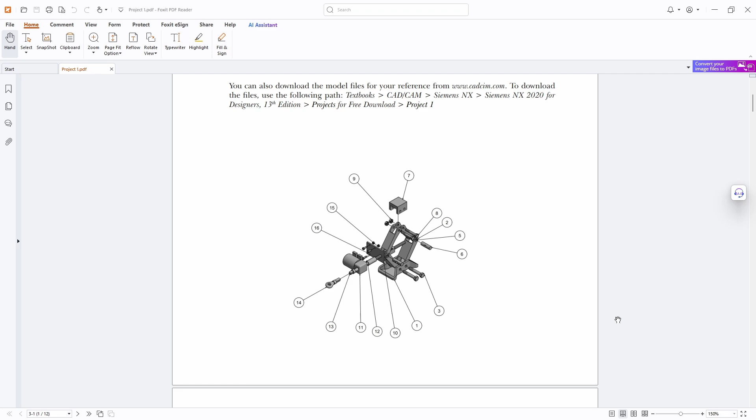Hello, today we will be continuing on with the car jack assembly. So in this assembly we will be working on item number 3 and 4. We got the hex bolt, the M12 by 1.75 hex bolt, and a nut. So 3 and 4. So let's zoom into 3 and 4 right here. These are 3 and 4s hidden on the other side.

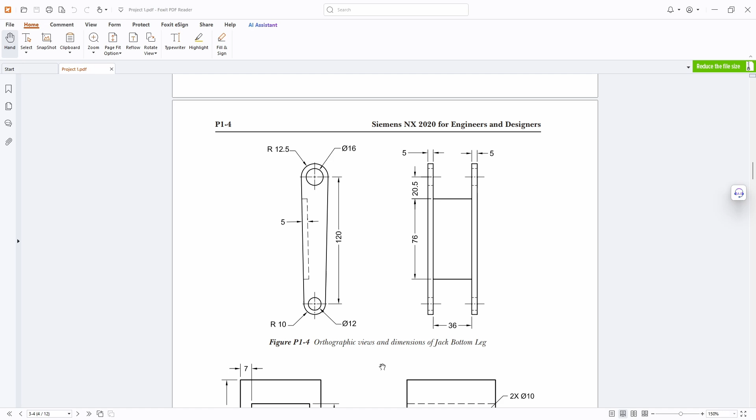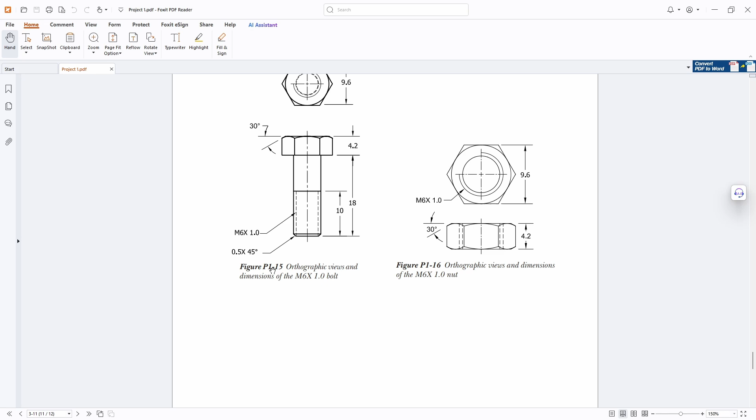And today we will be working on P1-17. So this is an M12 bolt. So we will take the previous bolt, which was P1-15, and modify this one to make it P1-17. So let's get started. Alright, so this is P1-15. We will do a file save as. And then we'll change that to P1-17.

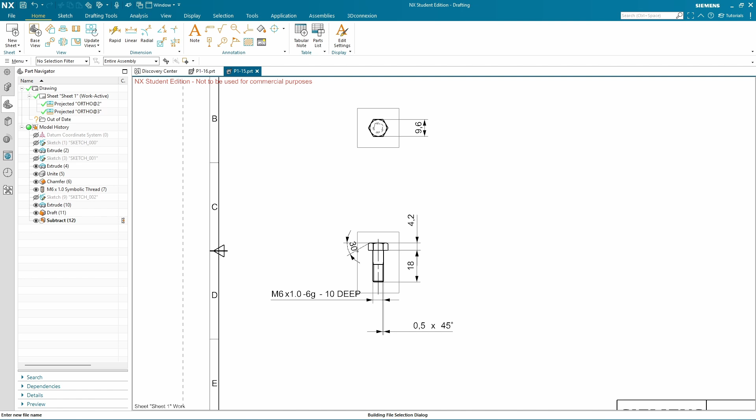Modeling mode. Now here's our item. We need to make the head size.

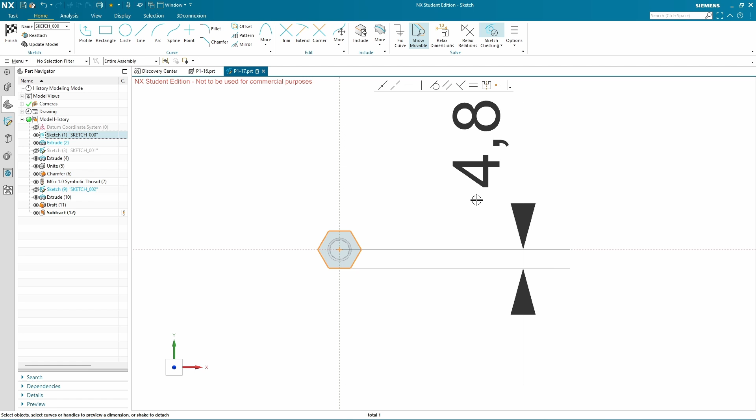Alright, so first one is we're going to click on this sketch right here, double click, and we're going to change this 4.8, and this time they're going with a total of 19.2, so we'll do 19.2 divided by 2, okay? And we don't need an expression, we're okay. Escape and finish that sketch, okay? It's starting to break things, but we're going to fix this in a second, no problem. So next is the extrude. So we're going to take the extrude and we're going to go with 8.4 millimeter.

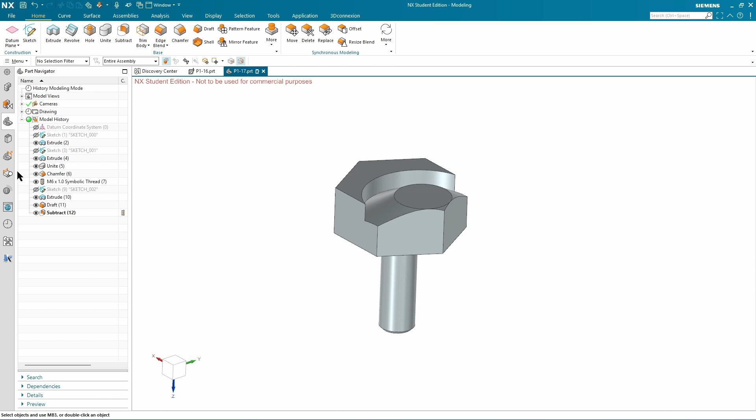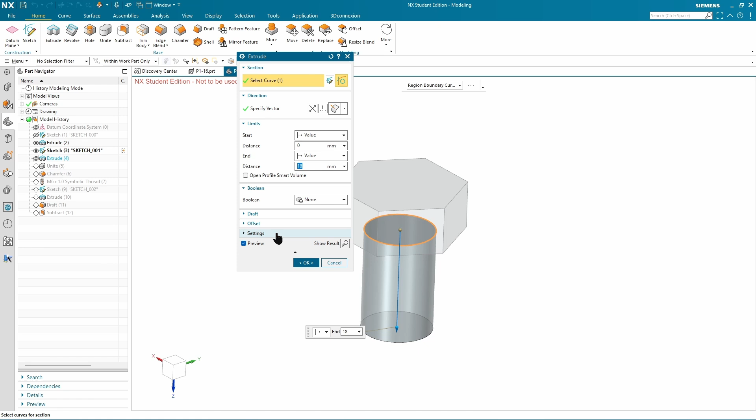Okay. Next we're going to go with the next one, which is this diameter here. This is going to change to M12. Escape, finish. There we are. Okay, so next is we want to extrude that 70 millimeters. Okay, it's okay. It's breaking. The symbolic thread is having an issue, so let's fix the symbolic thread.

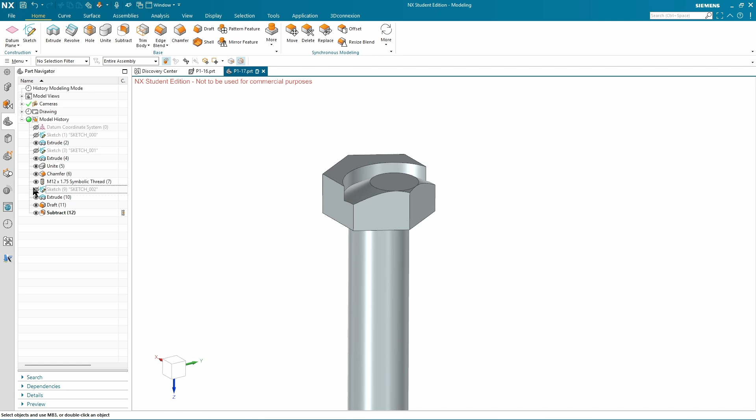Let's click on this guy, and we're going to click here, M12 by 1.75, exactly what we want. We're going to change this to 24. Okay, and now we can see this broke. For some reason it took it off something else. Yeah, should be there. So maybe we can just link this up, center that with center this, and make it coincident.

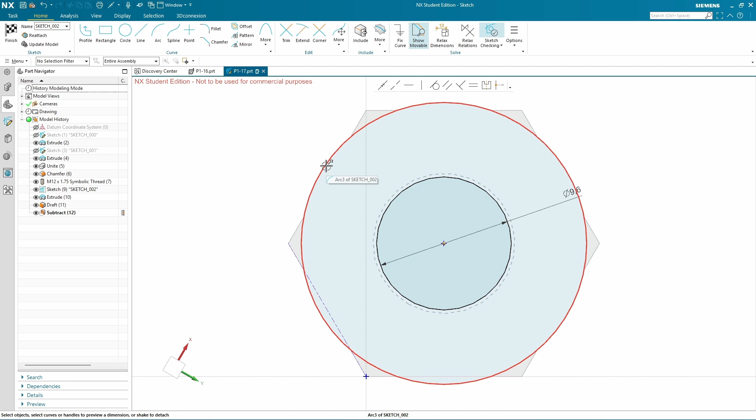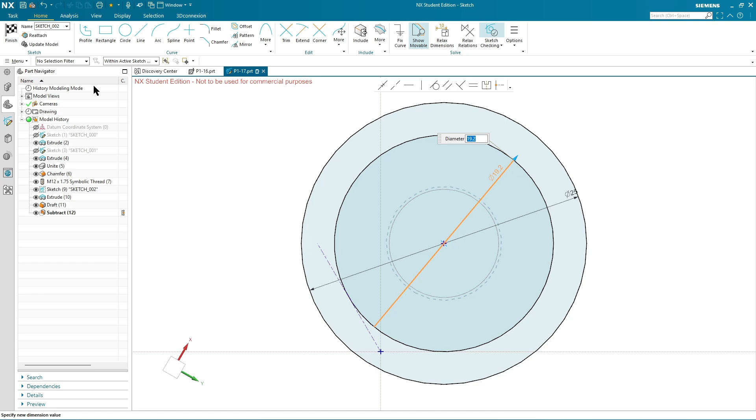Finish sketch. Alright, so now we see there's an additional issue. So let's go with the sketch size. We need to change this overall size of this guy now because it grew quite a bit. So let's click on that guy. Click on this here. We're going to change it to like 25. Okay. And then hit escape. Finish out of there. The beginning size, let's double click on that sketch again. This size right here has changed from 9.6 to 19.2. Okay, escape, finish, and there's our bolt.

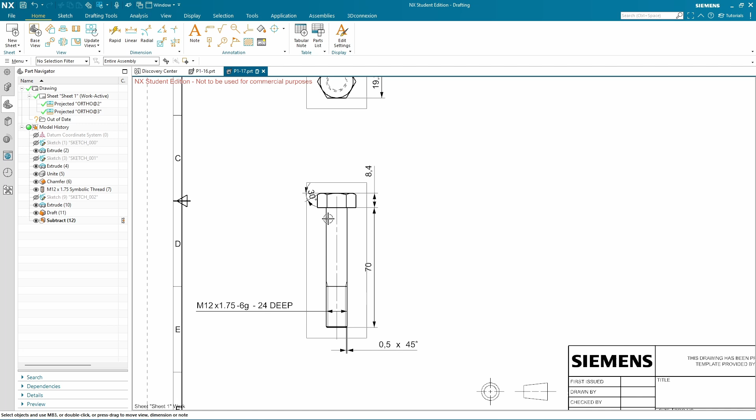So let's go to drafting. Let's hide this sketch, so we can click on that and we can go to hide. Let's go Control-Shift-D. We're out of date here. Let's go update views, update, okay. Let's check these dimensions, 19.2, 8.4, 70. This here, chamfer still there. M12 by 1.75, 24 deep, already updated. That's great. And 30. Perfect. We're done.